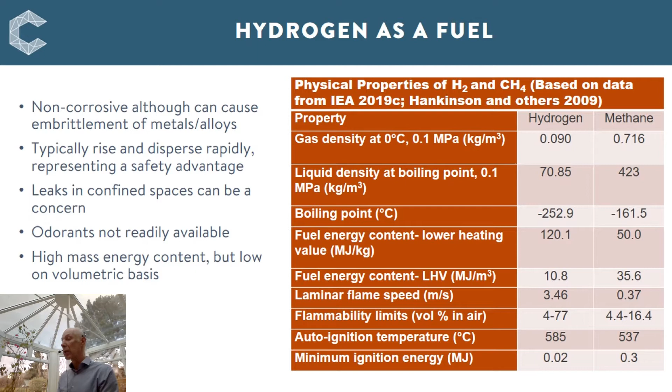Hydrogen has a high energy content of 120 megajoules per kilogram on a mass basis, whereas on a volumetric basis, the energy content at 10.8 megajoules per cubic meter is relatively low. This is a particular challenge for storage, where to store sufficient quantities of hydrogen gas, it is typically compressed and stored at high pressures.

Hydrogen can be classified as grey hydrogen, where the hydrogen is produced typically by steam methane reforming of natural gas or by gasification of coal; blue hydrogen, produced from fossil fuels as per grey hydrogen, but now including carbon abatement; and green hydrogen, produced through the electrolysis of water using electricity generated from renewable sources. There is a growing interest in the potential of hydrogen to become a clean energy carrier. The primary reason for this is its ability to support the reduction of greenhouse gas emissions.

Hydrogen is an energy carrier rather than an energy source, which means that its potential role has some similarities with electricity. A key difference, however, is that hydrogen is a chemical energy carrier, which means that it can be transported and stored in ways similar to more conventional fuels. It can be used in largely existing transportation and utilization infrastructure, allowing the adoption of business models developed previously for conventional fossil fuels.

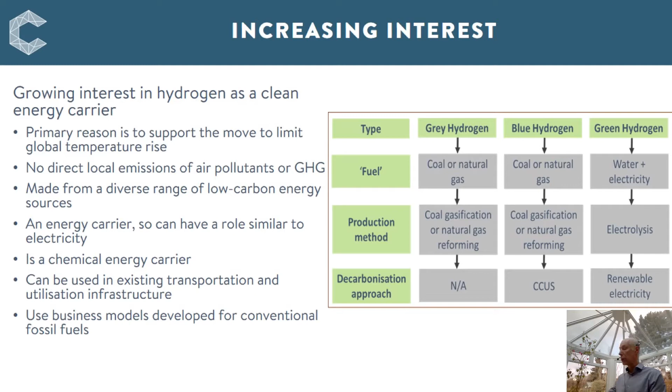Hydrogen is supplied almost entirely from fossil fuels, with coal accounting for around 27% of the hydrogen demand, natural gas accounting for over 70% of the hydrogen demand, and electricity as an energy input for electrolysis accounting for less than 1% of the hydrogen demand. In energy terms, the total annual pure hydrogen demand worldwide is around 275 megatons of oil equivalent, equating to 70 to 73 million tons of hydrogen per year.

The hydrogen is produced in dedicated facilities, primarily local to the point of use, and its main uses are upgrading of petroleum products in refinery applications and as a feedstock for ammonia production. In addition to this dedicated hydrogen demand, there is a further 45 to 48 megatons of hydrogen per year produced as a byproduct from other processes used for the manufacture of methanol, in the manufacture of steel, and as a synthesis gas for fuel or feedstock and process heating.

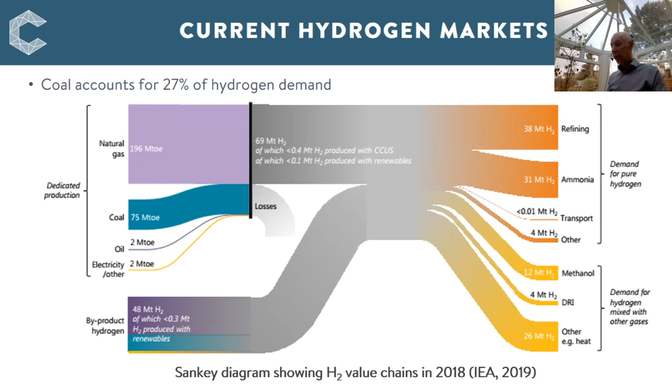A number of assessments of the future demand for hydrogen are being carried out. In all of these, hydrogen is seen as a necessary feature of the energy transformation required to limit global warming, where it could play an important role as part of a broader strategy. The breakdown of the forecast use of the hydrogen demand in 2050 is shown here, with a total demand of up to 78 exajoules or 650 megatons of hydrogen.

This hydrogen will be used primarily for industrial feedstock and energy, together with transportation, heating and powering buildings, and power generation usage, including hydrogen buffering. The spread of hydrogen usage across these sectors is reasonably uniform, with significant quantities of hydrogen used in each.

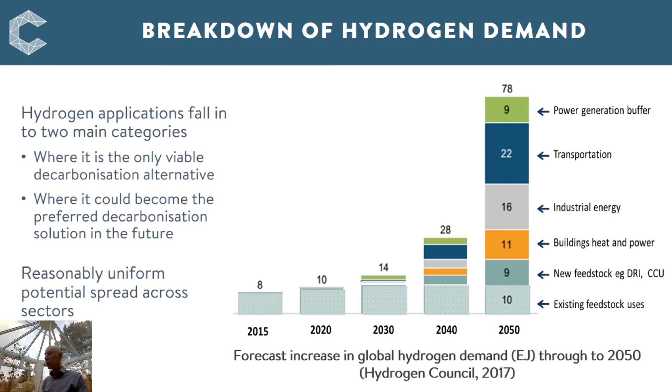Turning now to hydrogen production. Hydrogen production from coal using gasification is a well-established technology used for many decades by the chemical and fertilizer industries for the production of ammonia, particularly in China. In the gasification process, a hydrocarbon-rich feedstock, such as coal, is heated at high temperatures to produce a syngas rich in hydrogen, carbon monoxide and carbon dioxide.

The syngas can then be upgraded by converting the carbon monoxide to carbon dioxide and more hydrogen using the water-gas shift reaction. The CO2 can then be separated using relatively mature physical absorption technologies such as Selexol or Rectisol, which means that coal gasification can be a low-carbon hydrogen production technology. The process can produce a stream of hydrogen of around 99.8% purity using a final pressure swing adsorption step.

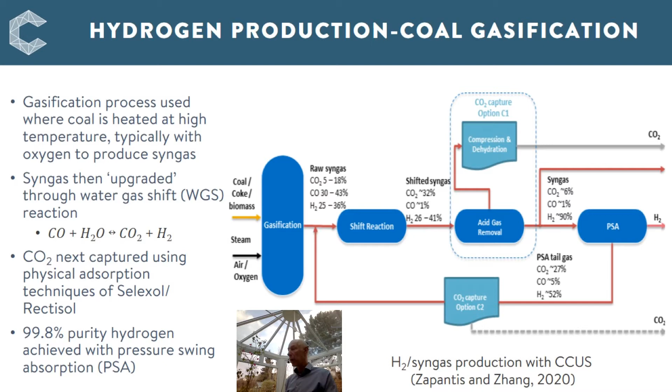In terms of gasification with carbon capture, there are currently 3 facilities producing hydrogen from coal, coke and petcoke at scale, with a combined capacity of around 0.6 megatons of hydrogen per year, namely Great Plains and Coffeyville in the USA and Sinopec Qilu in China. The Great Plains plant alone produces 1,300 tons per day of syngas, demonstrating the large-scale production of low-emissions hydrogen using carbon capture can already be technically and commercially feasible.

Additionally important is the Latrobe Valley gasification pilot plant in Australia, as part of the Energy Supply Chain project that will see hydrogen produced in Australia shipped to the Kobe plant in Japan for utilisation. Also interesting is the Pouakai proposed project in New Zealand, which integrates a natural gas-fired supercritical CO2 power cycle known as the Allam cycle, with an 8 Rivers steam methane reformer unit to produce hydrogen. Whilst this isn't a coal-based demonstration, the earlier NET Power Allam cycle demonstration in the USA shows that coal-based operation is feasible.

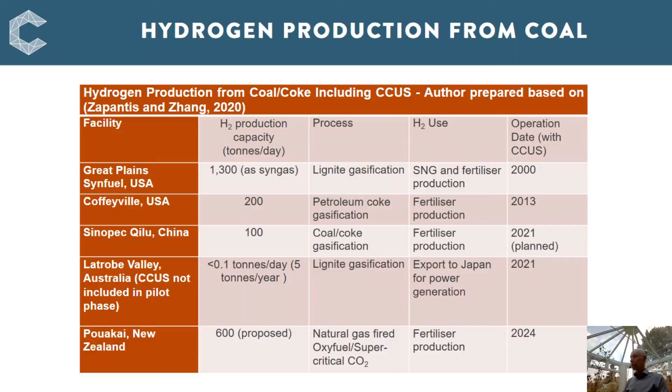In terms of costs, a number of analyses have been carried out to assess the costs of hydrogen production. In these studies, hydrogen costs vary significantly as a function of the production technology used, together with other local factors. This means that direct comparisons are difficult to make due to the varying assumptions. However, in general, blue hydrogen production routes are lower cost than green hydrogen based on water electrolysis, typically by a factor of around 3. Given the economic advantage of coal gasification and natural gas reforming with CCUS, it is likely that these will continue to be the lowest cost source of large-scale hydrogen in the near and medium term.

Hydrogen produced by coal gasification and SMR of natural gas with CCUS vary from $1.4 per kilogram of hydrogen to around $2.4 per kilogram of hydrogen. As shown in this US DOE report analysis shown here, hydrogen from coal gasification with CCUS can cost as low as around $1.6 per kilogram of hydrogen.

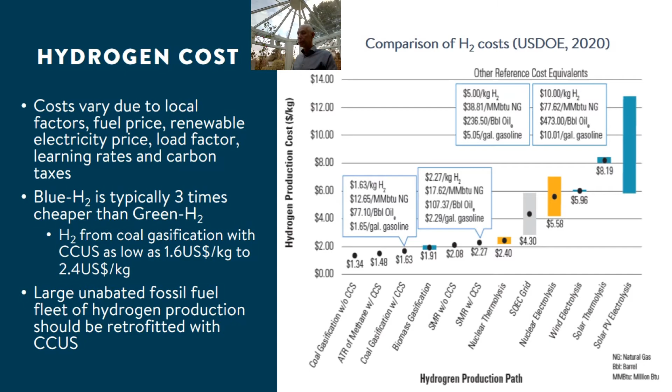Further analysis by the Committee on Climate Change shows that future savings from economies of scale could reduce the cost of future coal gasification with CCUS by around 10 to 15% by 2050. This cost assumes 95% carbon capture rate and a carbon tax by 2050 of £227 per tonne of CO2, such that the carbon cost would account for 25% of the cost of hydrogen production. The potential for very high capture rates to approach 100%, as well as co-firing coal with a proportion of biomass or other waste carbon-based materials, is therefore a potential direction of development for coal-based CCUS plant.

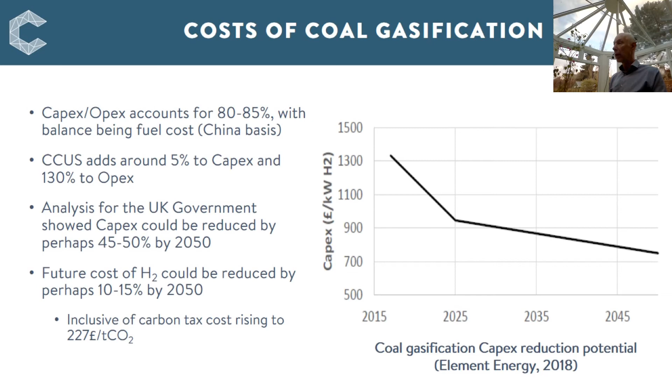It should be noted, however, that in this analysis by IRENA, the cost of hydrogen production from fossil fuels is assumed to be constant over the period through to 2050, resulting in an increase in the levelized cost of hydrogen due to the assumed increase in carbon tax over the period. As shown in my last slide, however, this is unlikely to be the case.

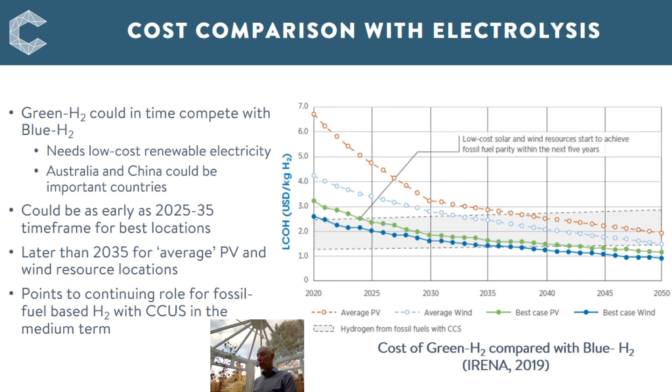But focusing on water electrolysis aspects of the study, the forecast is for hydrogen from low-cost wind to start to be competitive with the upper range of fossil fuel-based hydrogen prices in less than 5 years, perhaps competing with the lowest cost fossil fuel-based technologies by 2035. This again suggests an important role for low-carbon, fossil fuel-derived hydrogen into the medium term.

However, when CCUS is added, this carbon intensity can be reduced to below 3 kilograms of CO2 per kilogram of hydrogen as shown, based on 90% CO2 capture. In comparison, water electrolysis using renewable electricity only is close to zero CO2.

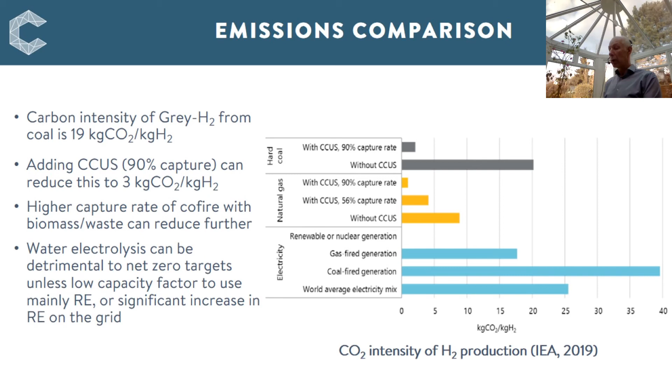But where grid electricity is used, which of course contains a portion of fossil fuel-based power generation, emissions can be around 25 kilograms of CO2 per kilogram of hydrogen, i.e. higher than unabated coal. The outcome of this is that in terms of moving towards net zero emissions, the impact of using water electrolysis could be detrimental unless the water electrolysis process is used at low capacity factor to use mainly renewable electricity.

The number of countries producing hydrogen strategies and the scale of ambitions contained in them is increasing. To support these national strategies, the IEA has identified 5 policy actions through to 2030 which should be pursued to increase the uptake of hydrogen and the energy transition. In general, these policy signals are needed to provide key stakeholders with certainty that there will be a future marketplace for hydrogen.

Climate policies in particular will be important, with potential actions including the establishment of high-level instruments such as emissions reductions targets or commitments to deploy certain energy resources or carbon pricing systems. A priority should be the deployment of hydrogen technologies at scale, where a good approach to achieve this would be to deploy clean hydrogen production at scale as part of industrial clusters.

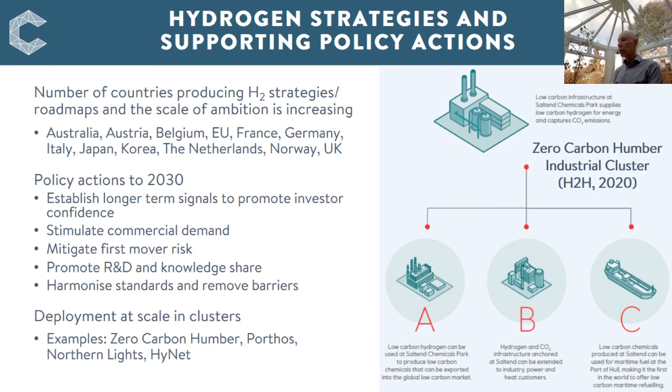So finally, to conclude, the total global hydrogen demand in 2018 was around 115 megatons of hydrogen per year, which was produced local to the point of use, almost entirely from fossil fuels, with coal accounting for around 27% of the hydrogen supply. The global demand for hydrogen is forecast to increase, perhaps as high as 650 megatons of hydrogen per year by 2050.

Hydrogen production from fossil fuels with CCUS is lower cost than green hydrogen based on water electrolysis, typically by a factor of around 3. Coal gasification with CCUS costs typically $1.6 to $2.4 per kilogram of hydrogen. Learning by doing through large-scale commercial rollout, together with cost reduction through technology innovations, could reduce the cost by perhaps 10 to 15% by 2050.

In terms of emissions, the addition of CCUS can reduce the carbon intensity of this process to below 3 kilograms of CO2 per kilogram of hydrogen. Capture technology with increased capture rates approaching 100% should be explored in the medium to long term in the transition to 2050 to further reduce this, with co-firing being an additional option.

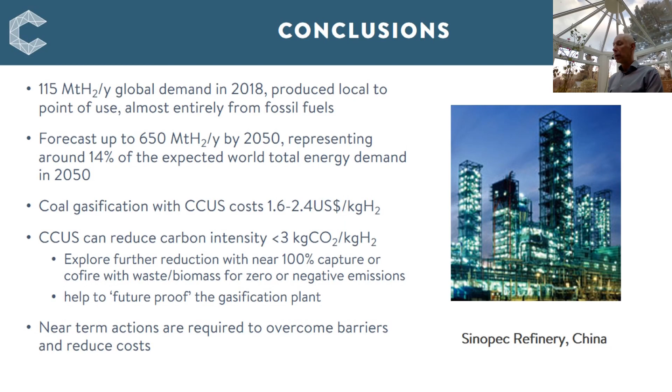Near-term actions are required to overcome the barriers and reduce costs to increase the uptake of hydrogen. This includes policy actions to send positive, long-term signals to potential investors. So overall, it seems clear that to produce low-carbon hydrogen at scale, fossil fuel sources, including coal, will continue to be needed in the medium to long term, particularly for industrial uses. Thank you for listening.